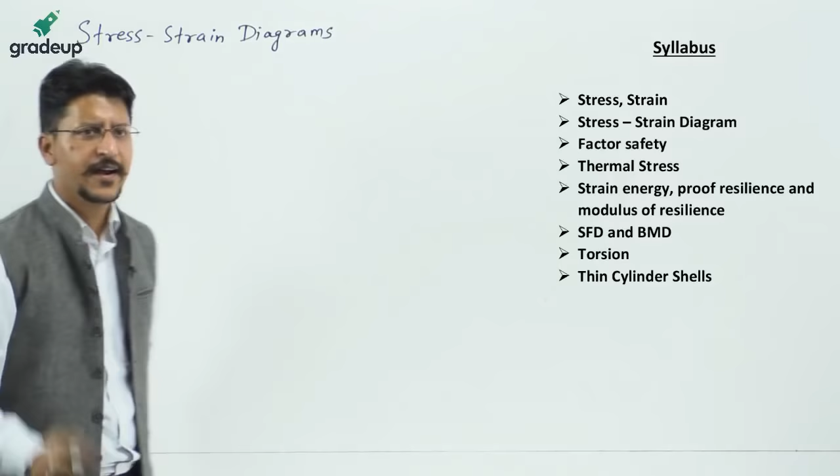Now the stress strain diagram, we will see the concept of the stress strain diagram. We will analyze each and every point in that stress strain diagram in greater detail, and then there are some related terms, like toughness and resilience, and the moduluses of these, that is modulus of toughness, modulus of resilience. Then there comes the concept of strain energy. All these concepts come from this stress strain diagram, so we will have a greater look into this.

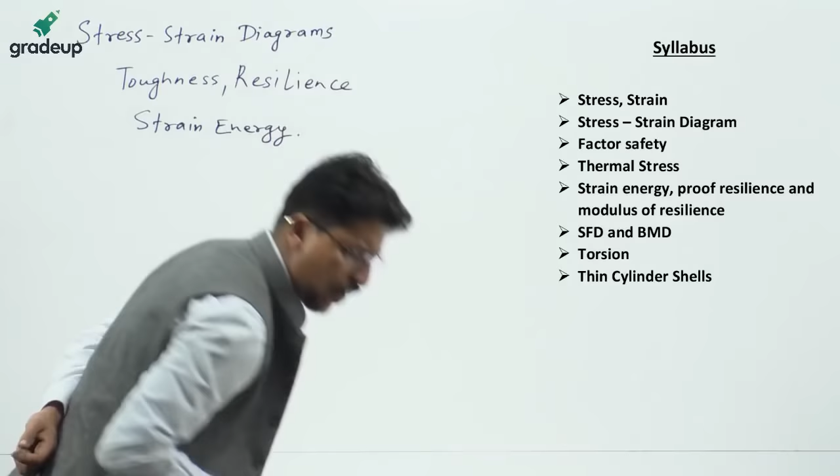Then comes the important topic of factor of safety. It is also one of the important topics when we talk about strength of materials. Then it is written in the syllabus about thermal stress, and in thermal stress there will be all the cases that we will be discussing.

This is not just what we are going to cover, I am telling you the greater details of the syllabus, which if you are preparing on your own, these are the things you want to learn or cover from the exam point of view of SSC and RRB JE, from the subject of strength of materials.

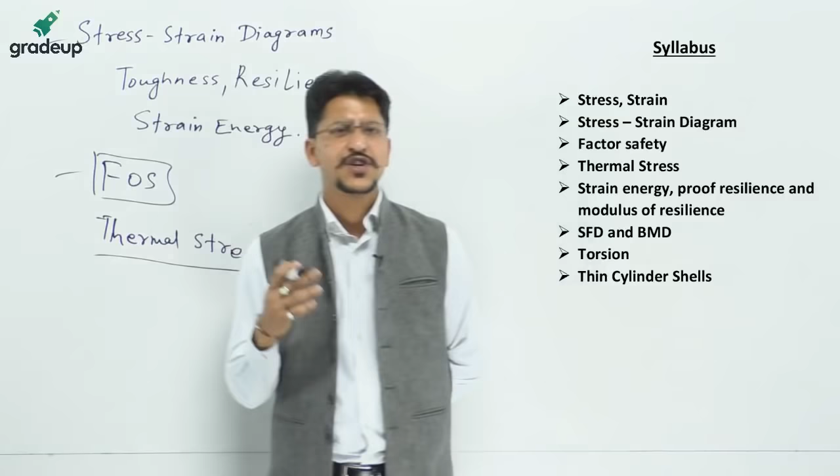So in thermal stress we will be taking the different conditions, like the completely constrained case, partially constrained case, and the free expansion case. Then the strain energy, proof resilience, modulus of resilience, as I have already discussed.

Then about SFD and BMD, there are different important cases. There are different types of beams, the cantilever beams, the simply supported beams. We will see what are the indeterminate and determinate beams, which we will consider in this topic of SFD and BMD.

Then talking about torsion, the twisting, that is also important. The class has just started right now, don't worry, you are not late, we have just gone 5 to 6 minutes into this class.

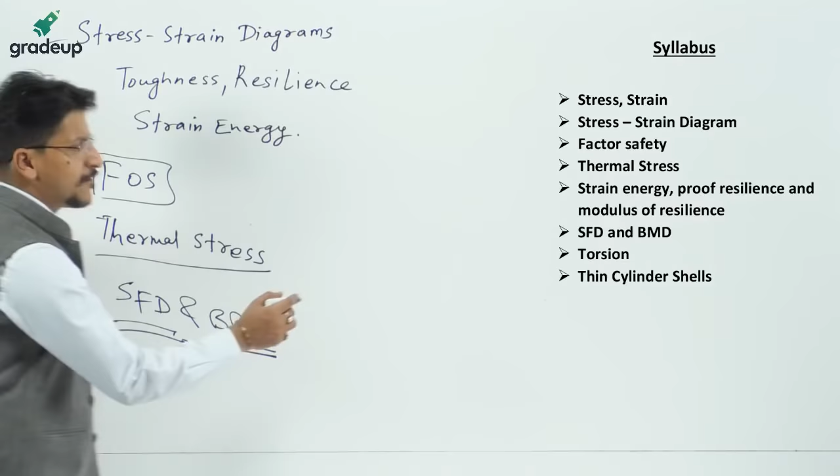In torsion we will be covering, torsion is an important case, we will see shafts that are in series and parallel, that is basically part of the syllabus. Then it is mentioned in the syllabus about thin cylinder shells, which you might have also learned by the name of thin pressure vessels.

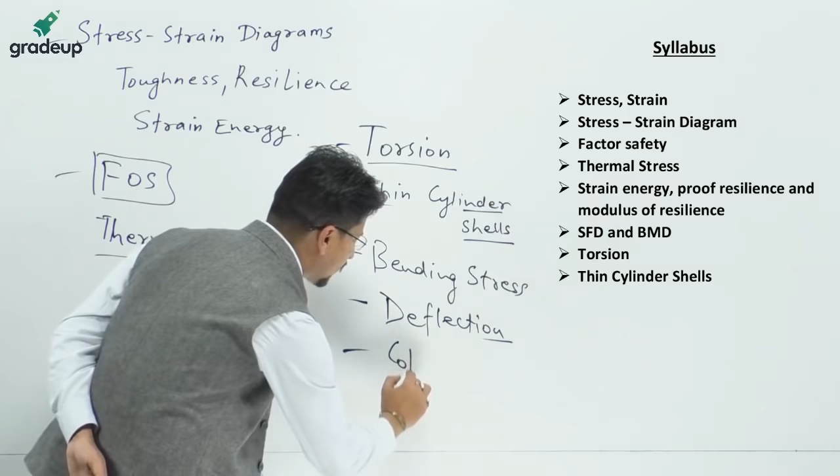These are the important topics mentioned, but other topics which are important but not mentioned in the syllabus are like bending moment or bending stress. Just like torsion, bending stress is also important. Then one topic comes out here, that is deflection. Questions have in the past come from these topics also, bending stress and deflection. And one more topic from which questions have come is column buckling, which you might have also learned by the name of columns and struts.

So these are all the topics which are important or which you really need to cover from the subject of strength of materials, mechanics of solids, mechanics of materials, by whichever name you have read this subject.

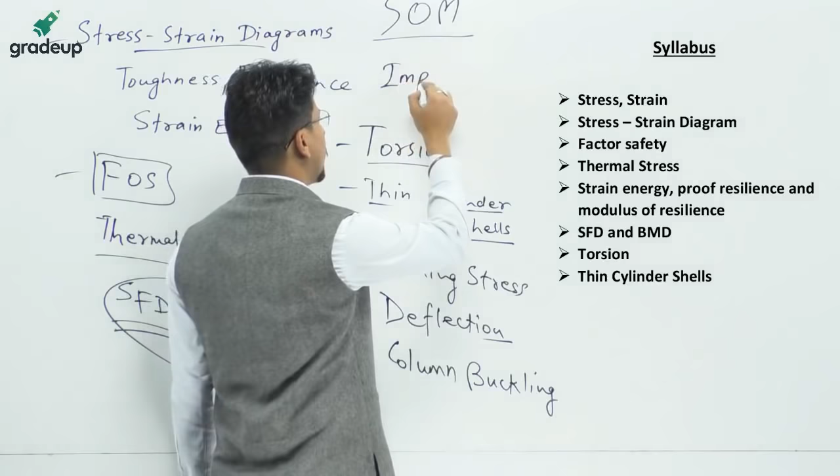The last class is on 27th. In this last class of strength of materials in the Gradeup JE'19 plan, we will be discussing important MCQs regarding the subject of strength of materials, so that we can get some practice. That is the plan for this subject.

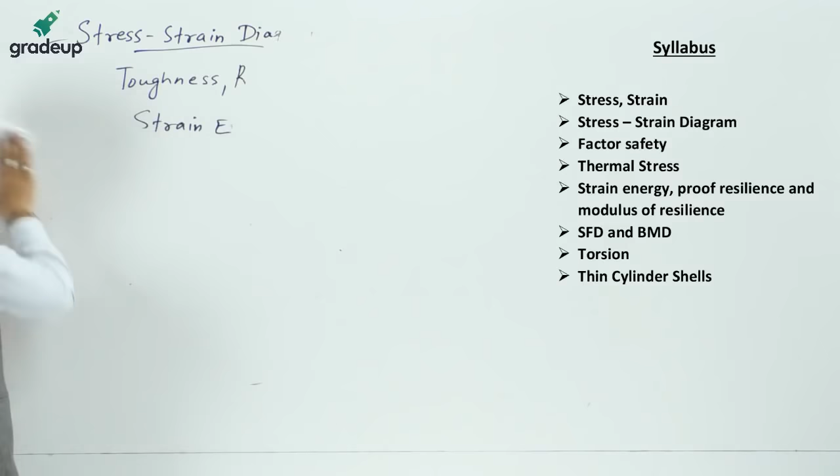So today I have shown you the syllabus. Now I will be showing you around 15 plus questions, the previous year questions which have come in the actual exams of RRB and SSC JE, and you just have to look into those problems, try to identify the topic, give the answer and gauge the level of the examination.

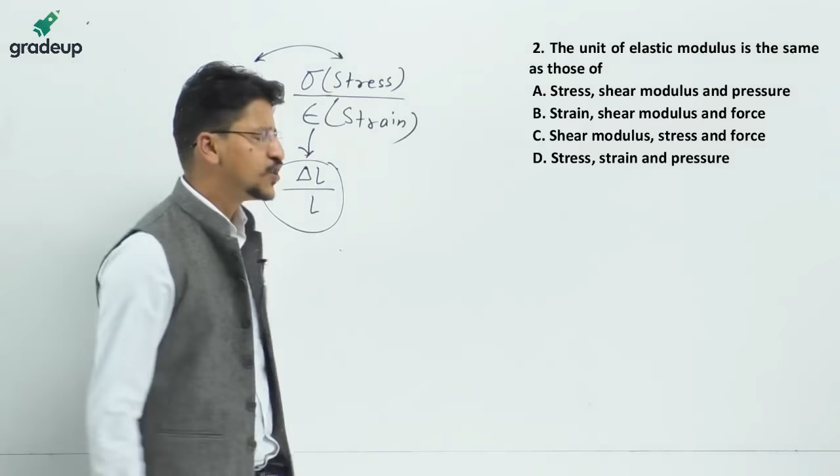G is again tau by gamma, that is the shear stress upon shear strain. This is also shear strain, the angular deformation we measure, so that is unitless, and this has the same unit. So this is stress, G is the shear modulus, same unit, Newton per meter square or Newton per mm square. This is the unit of pressure as well. So all these terms - stress, shear modulus, elastic modulus, pressure - all have the same units. So the correct answer is option A.

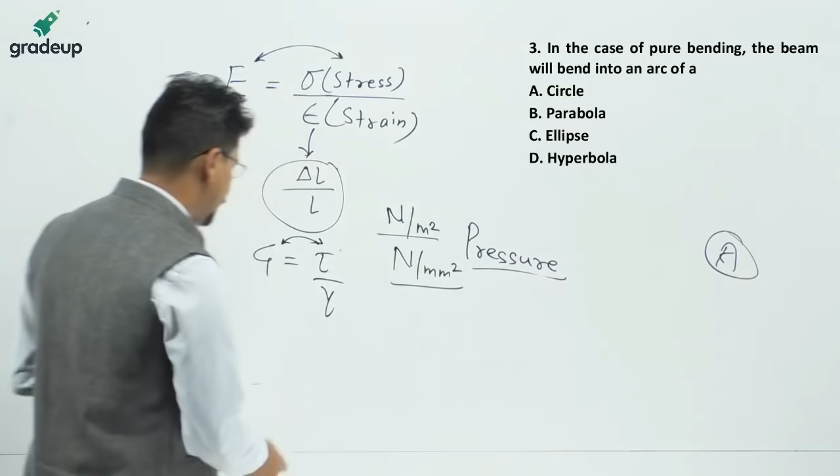Now moving on to the next problem. This says in the case of pure bending, the beam will bend into an arc of. In the case of pure bending, please read the question first and then give me the answer. We are talking about the pure bending case.

Yes, answer 2 is absolutely correct, that is A for 2. Now in the case of pure bending we are talking, the beam will bend into an arc of. Three answers have come in, only one answer I have got. Now I am getting the answer A and B. I have also got the answer as B. Most of you are giving me the answer as A.

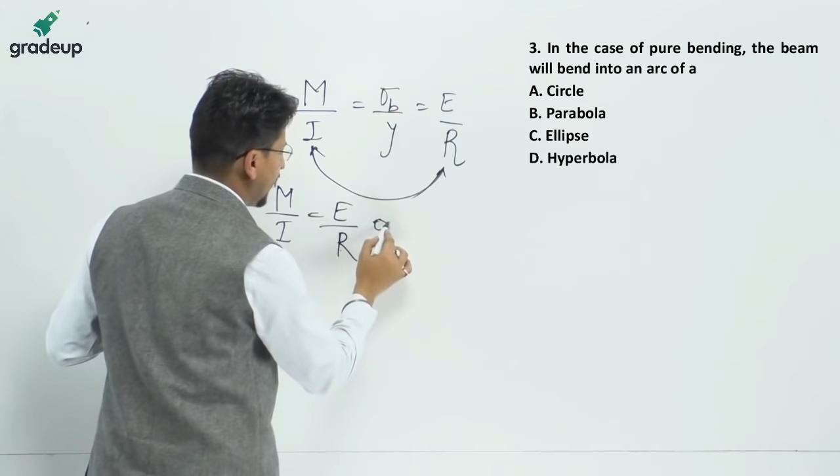From the bending equation, we know that M by I is equal to sigma b by y equal to E by R. This E is the elastic modulus, this R is the radius of curvature of the circular arc. And if we are talking about pure bending, that means this M is constant. So taking these two cases together, what we get - M by I is equal to E by R, or we can also write this as R equal to EI by M. When this is constant, the material E is constant, the I is also constant due to the geometrical property.

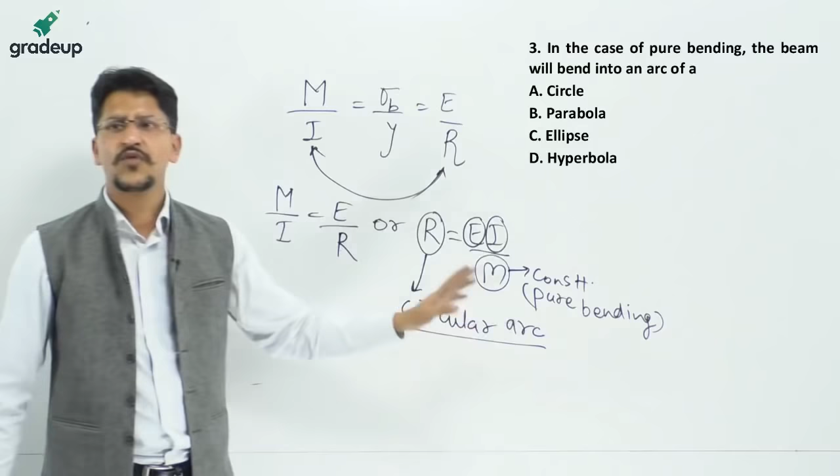And this M is also constant. So this R will be a constant. And when R is a constant, that means it's a circular arc - it will form a circular arc, not a parabolic arc. Parabolic arc is formed when there is the case of only bending, not pure bending. Pure bending means that M is a constant - this is the case of pure bending. Either it is written that it's a case of pure bending or that M is a constant, that means one and the same thing. So the answer for this one is option A. Those who were saying the answer as B, please take a look - B is not the answer, A is the correct answer for this one. Case of pure bending - please note that word pure bending, it is written.

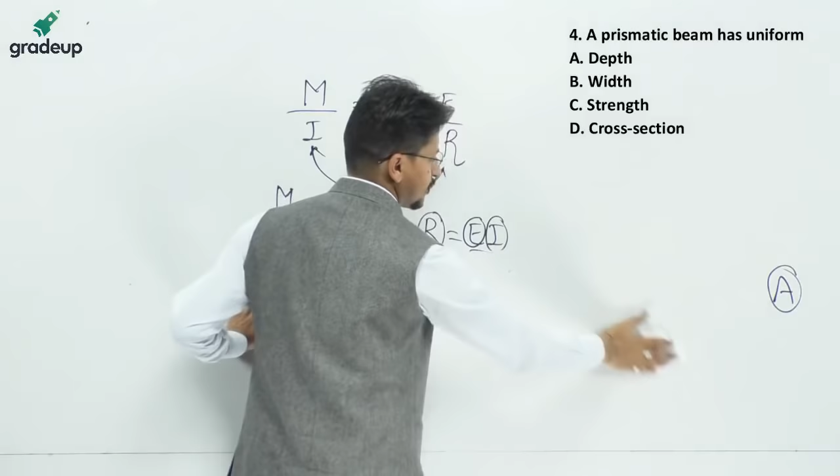Now see the next question. What is a prismatic beam? It is talking about a prismatic beam. What is a prismatic beam? A prismatic beam has uniform - what does a prismatic beam have uniform? Prismatic beam has a uniform...

Option like circular arc. What was written in that? Into an arc of a circle. I don't know what is the problem you are facing. That is the right answer for that one. Yes, Radhe Shyam Prajapat, what didn't you understand? Please tell me.

Just take the bending equation. Take the first and third terms, that is M by I equal to E by R. In the case of pure bending, M will be constant, so R will be constant. And if the radius of curvature of the arc is constant, that means it's a circular arc. Okay, that is what I need to tell you.

Yeah, fourth one. Prismatic beam has a uniform... Some of you are saying D. Most of you are saying D. Some of you are saying B, A, C. I get a mixed set of answers. But what is a prismatic beam? A prismatic beam is a beam which has the same cross section.

Okay, we are not talking about the width here. The width can vary, but the area of cross section must be the same throughout the length of the beam. Okay, so the right answer for this one is absolutely option D. That is, a prismatic beam has uniform cross section or area of cross section.

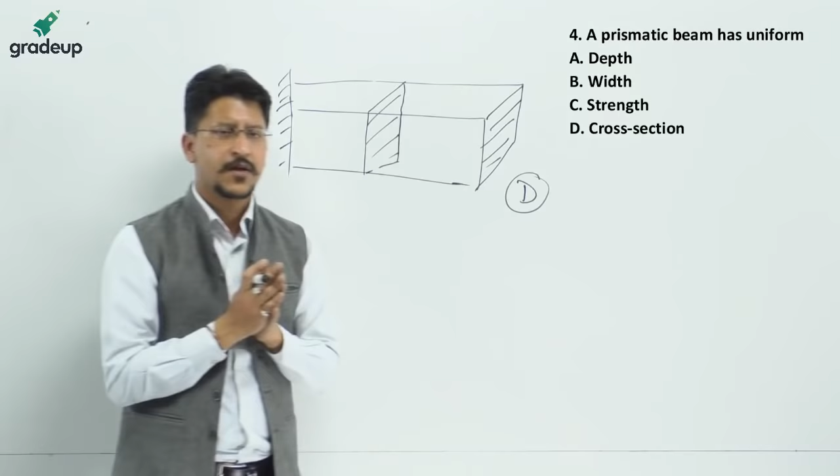I will be constant, because I depends upon the cross section. For a circular cross section, I is constant. If you take a square cross section, I is constant. For a rectangular cross section, I is constant. For the I section, the triangular section, for all those, the value of I is constant. That is the moment of inertia, or the second moment of area.

So that's why I is constant, and E is constant, that is the material property. If it is made of the same homogeneous material, it has the same E. And I depends on the cross section only. And if it is a case of pure bending, then M will also be constant. So that's why R becomes constant and it's a case of a circular arc. The fourth question, I think nobody has any problem in this. Cross section.

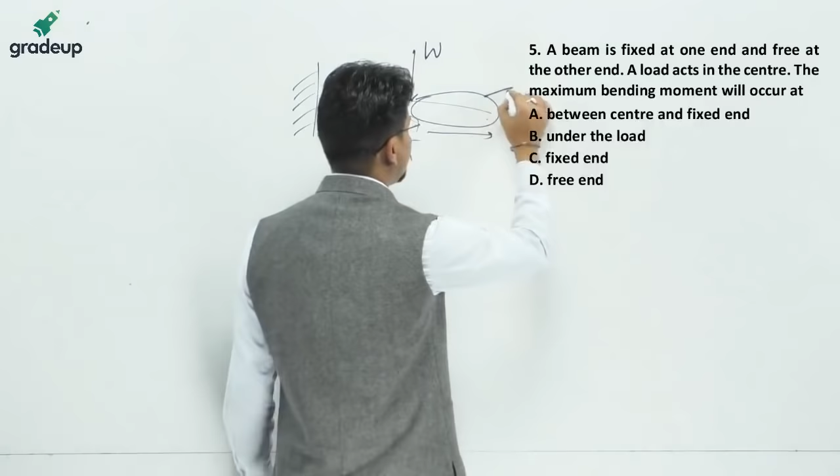Yes. Then if you see this much part of the beam, there is no load acting on this, so there will not be any shear force and no bending moment. So in this case, there will be no shear force and no bending moment in this part. Okay, only the shear force and bending.

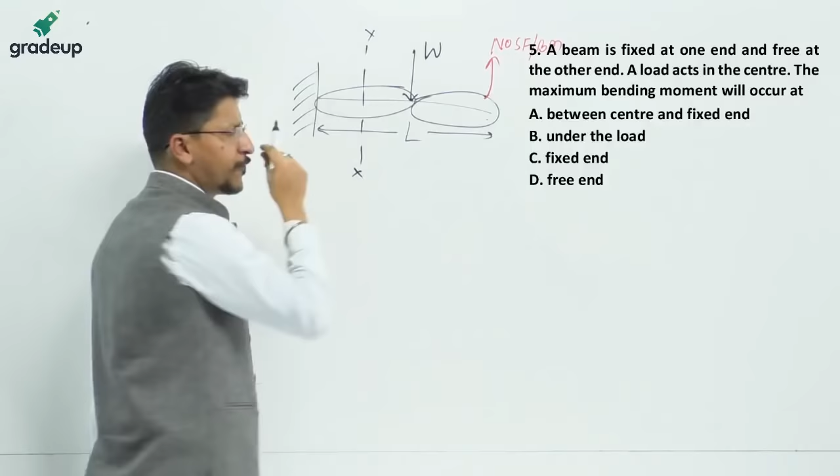In this section, if I talk about, there will not be any shear force and not any bending moment in this much section. Okay, and in this much section, there will be a shear stress and there will be a shear force. Okay, so if you take any section XX from this side, and if you consider it from this length, at a section X, what will be the shear stress? The shear force will be basically W into X. Okay, W into X, that will be the shear force.

And what will be the bending moment? The bending moment will be equal to this force, that is W, into this. Sorry. This will be W. The shear force will be W at each and every cross section from the point of loading till the end point. And the bending moment will be equal to W into X. Okay. So X is starting from this point and going up to here.

So if you write this end point as A, and the point of application of load as B, the bending moment at B will be equal to 0. Why? Because we are considering the X from this point and X at B is equal to 0. So the bending moment will be equal to 0. And the bending moment at A will be equal to W into L by 2. That is maximum, because the X will be maximum at the fixed end. Okay, so the answer is absolutely correct, all of you who have given me the answer as option C.

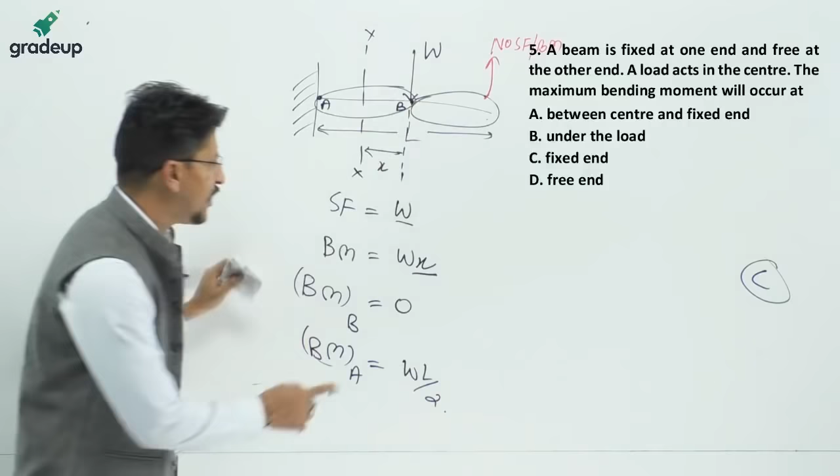So till now you can see that this is the case of a point load, and from the point load, the shear force is a constant and the bending moment is of one order, that is, linearly dependent on X. This we will discuss in greater detail when we come to the class of SFD and BMD. Okay, so till then note this answer, option C is correct. And now moving on to the next problem.

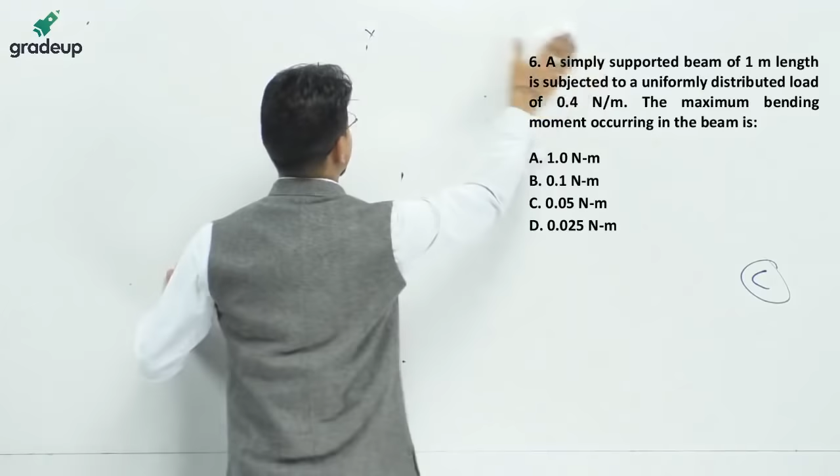Now Rahul, the question which you are talking about, the simply supported beam, has come. Now you can see this. See this question. Maximum deflection is at free end and maximum shear stress is at the fixed end. Yes, absolutely correct. Pankaj Yadav, Ramesh Kumar Singh, you both are absolutely correct. Okay, now read this question.

A simply supported beam of 1 meter length is subjected to a uniformly distributed load of 0.4 Newton per meter. The maximum bending moment occurring in the beam is? Okay, so this is a case of a simply supported beam. Let me draw a simply supported beam having a UDL. Let me draw a UDL out here, having the intensity as 0.4 Newton per meter, and this total length, the span, is 1 meter.

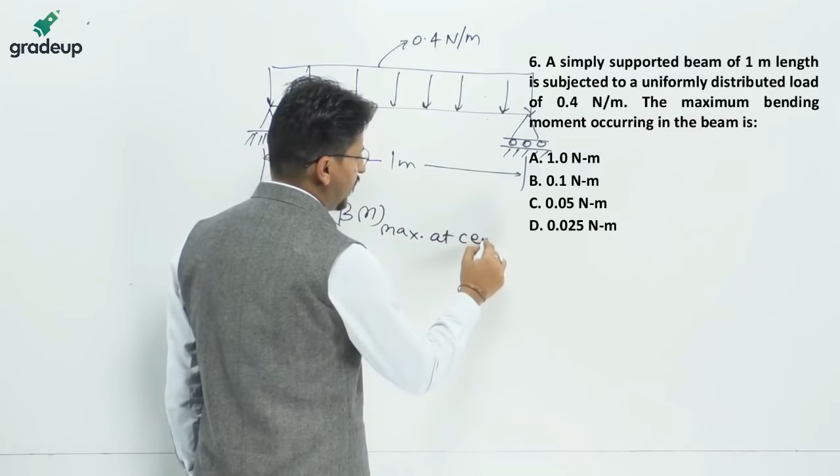So for this case, the bending moment is maximum at the center. That is given by WL square by 8, where this W is the load intensity, that is the UDL. So just put the values, W as 0.4, the span as 1. So 1 square divided by 8. So this is 0.4 divided by 8, which you will get as 0.05. So the answer for this one is 0.05.

That is the answer as C. C is the right answer for this one. About each and every case of cantilever beam, that is the point load, the UDL, the UVL, uniformly distributed load, uniformly varying load, the cases of distributed and varying moments for the simply supported beam, cantilever beam, all that we will discuss in very great detail when we meet on 25th, in the class of SFD and BMD.

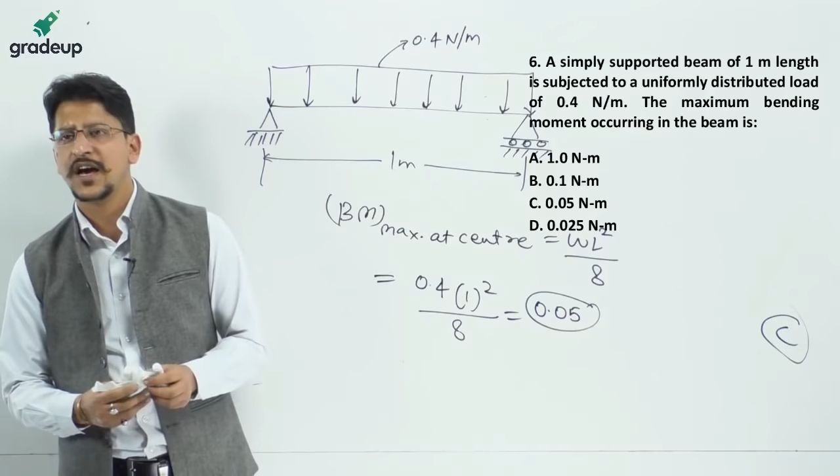Okay, move on. Now the question is from cylindrical shells, that is thin cylindrical shells or thin pressure vessels. Give me the answer for this one. Circumferential stress in a thin cylindrical shell due to internal fluid pressure is given by. We are talking about the circumferential stress. Please note down that, circumferential stress. First of all, you give me the answers.

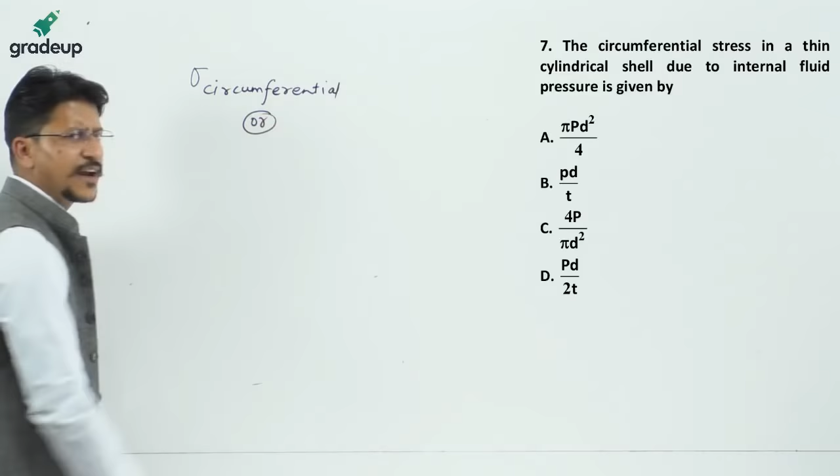So give me the answer for this one. Circumferential stress in a thin cylindrical shell due to internal fluid pressure is given by stress, that is sigma circumferential, also known by another name, sigma hoop, that is the hoop stress. This is given by P di upon 2t. If di is not mentioned, it is obvious that it is the internal diameter. t is the thickness, and P is the pressure. So you get the answer clearly written as PD by 2t.

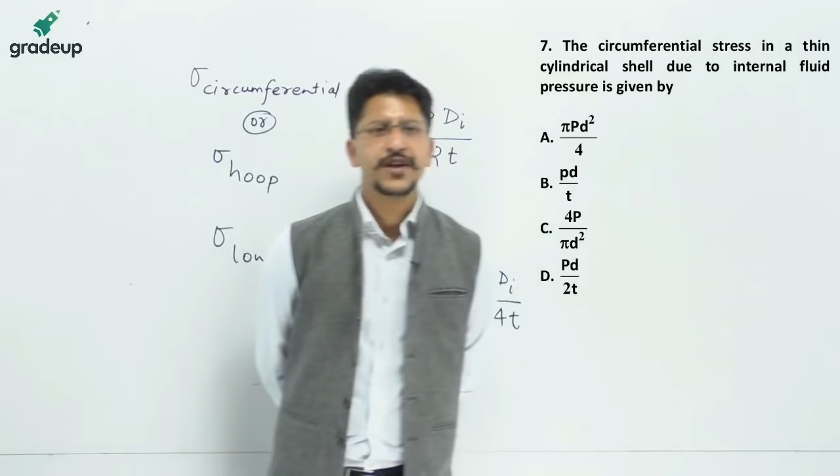And there is one more stress that is not asked in this question, but you must all know. That is the longitudinal stress, which is just hoop by 2, half of hoop, that is PDi by 4t. These are the two kinds of stresses present in the case of thin cylindrical pressure vessels. Now I ask you one condition from this same topic of pressure vessels. This is not part of the questions given here. I just want to have a look at your concepts.

Pressure vessels are of two types, thin and thick. So I want to know what is the value of d by t, that is the internal diameter upon thickness. Can any one of you give me the approximate value of d by t which differentiates or classifies the pressure vessels as either thin or thick? Hurry up. This is just a part of concept, just the starting of the topic of pressure vessels. As the question has come from pressure vessels, you must know this too.

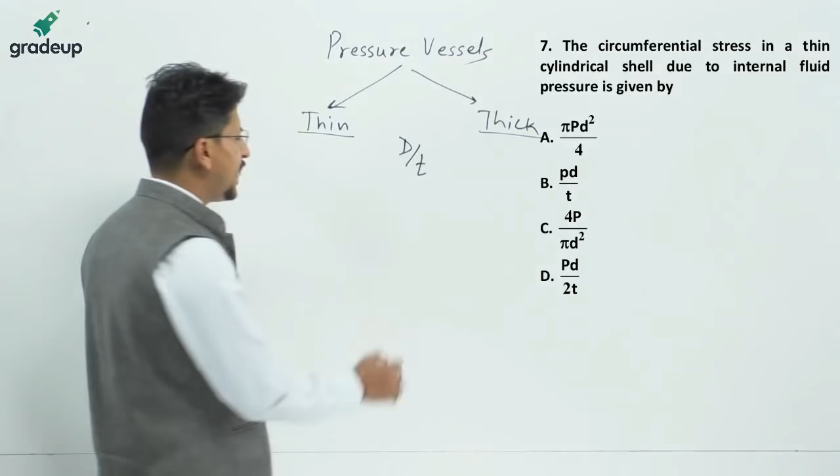That is the d by t ratio, not the slenderness ratio. The slenderness ratio comes in the case of buckling of columns. Yes, d by t. Yes, 20 or 15. Sometimes in some books it is written as 15 as well. Not 10, it's 20. It's either 15 or 20, not 10. If it's less than 20, it means it's thick, and if it's greater than 20, it means it's thin.

Yes, less than 20 means it's thick. Greater than 20 means it's thin. And it's a d by t ratio. As the d by t ratio increases, that means the thickness is decreasing. So thickness is decreasing, that means it's becoming a thin shell.

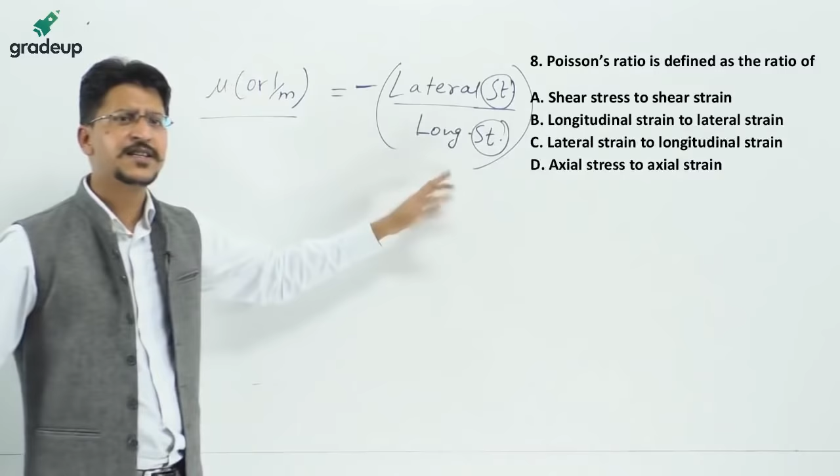If sometimes a question is asked, what is the unit of Poisson ratio? You can see that it is strain by strain. Strain in itself is a dimensionless quantity, and moreover this mu is strain by strain. Okay, so it is the ratio of two strains, so that's why it is unitless, or basically you can say dimensionless. This is a unitless or a dimensionless constant.

Why the negative of lateral strain? That is, why have we introduced a sign here? Okay, because if this is positive, this will be negative. If this is negative, this will be positive. So this ratio will become negative altogether. Okay, if this ratio becomes negative altogether, so to make this value mu positive, it is minus of lateral strain by longitudinal strain.

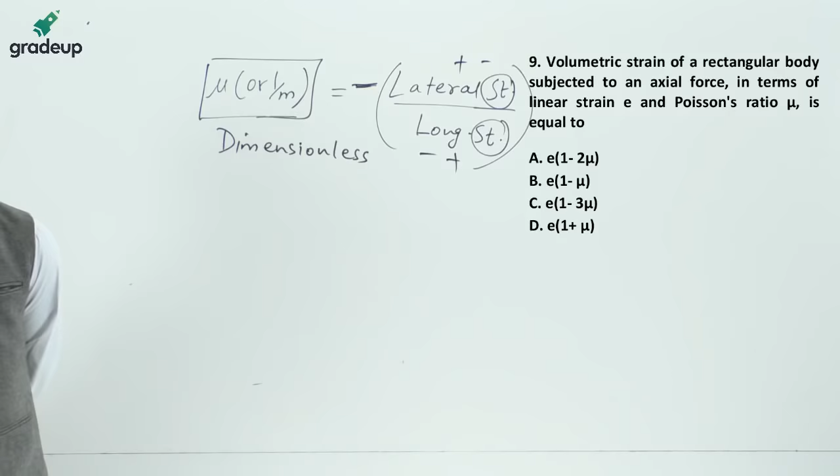Okay, now see the next problem. It says the volumetric strain of a rectangular body subjected to an axial force, in terms of the linear strain e and the Poisson ratio mu, is equal to. See, for this question I will be drawing a diagram to explain in greater detail, and if you follow this kind of strategy, questions like this are not a problem. The concept of stress, strain, the Poisson ratio and everything will be clear through this question.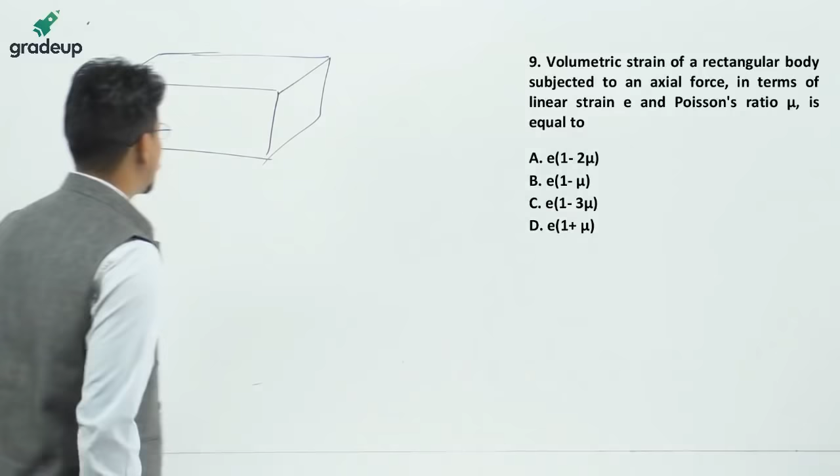What I am going to do here is, see, this is the x direction, the y direction and the z direction. Okay, x, y and z. No, we should not use the value of, that is what the definition only says, minus of lateral upon longitudinal. Okay, so these are x, y and z. This is x, that is px. Suppose the load acting in the x direction is px, this is py and this is pz.

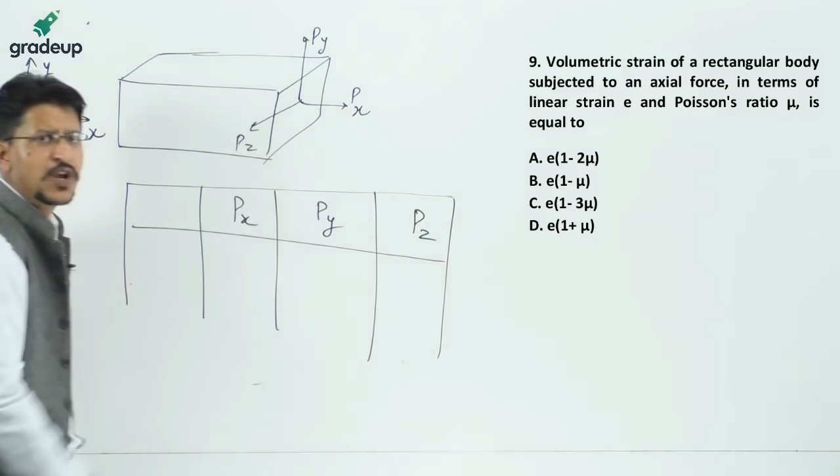These are the three loads acting in the three mutually perpendicular directions. And here I write the directions: the x direction, the y direction, and the z direction. So if you see this, the px load in the x direction will cause a longitudinal stress or longitudinal strain. These are the strains I am talking about, the strains in the x, y, and z directions.

So this can be written as px upon e. For this one it is longitudinal. For the others, this px in the y and z directions will give a lateral strain, so that is minus mu into px by e and minus mu into px by e. Similarly, py will be longitudinal for y, so this will be simply py by e, and this is minus mu into py by e, and minus mu into py by e.

And for the z direction, this will be a longitudinal strain, pz by e, and for these two it will be lateral, so minus mu into pz by e and minus mu into pz by e. Now we see for each direction what strains are produced. For the x direction, we get px by e minus mu times py by e minus mu times pz by e.

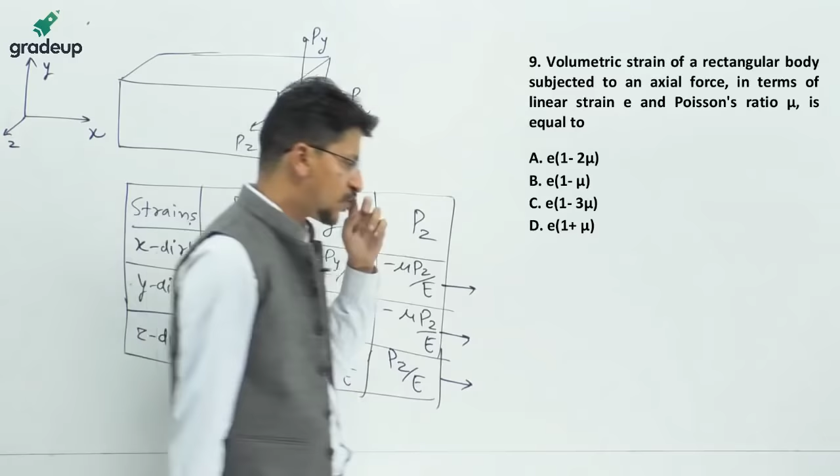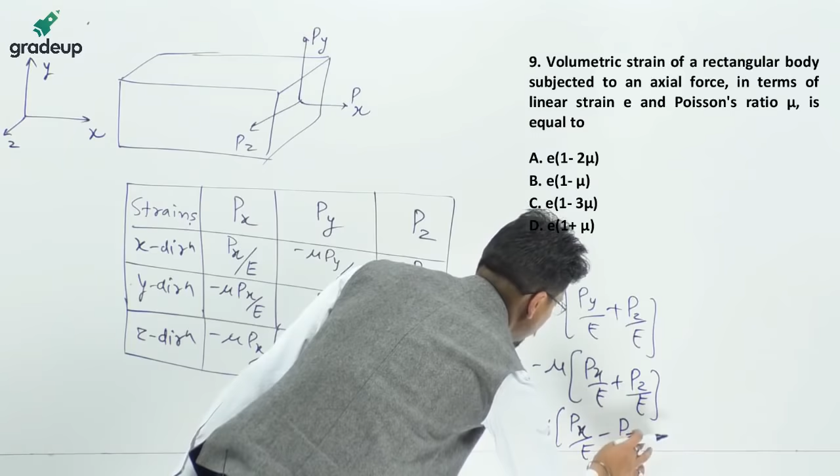So if we talk about this, this will become px by e minus mu times of py by e plus pz by e, for x. For y and z it will be similar: py by e minus mu times of px by e plus pz by e. And for the z direction, this will become pz by e minus mu times of px by e plus py by e.

Okay, so this is basically the value of strain in x direction, strain in y direction, and strain in z direction. And you know the volumetric strain. What is the volumetric strain given by? The volumetric strain is given by epsilon x plus epsilon y plus epsilon z.

Just adding these three terms, we get the value of volumetric strain as px plus py plus pz by E into 1 minus 2 mu. We get this term. So let me rub this one and write it here. Volumetric strain is equal to px plus py plus pz divided by E into 1 minus 2 mu.

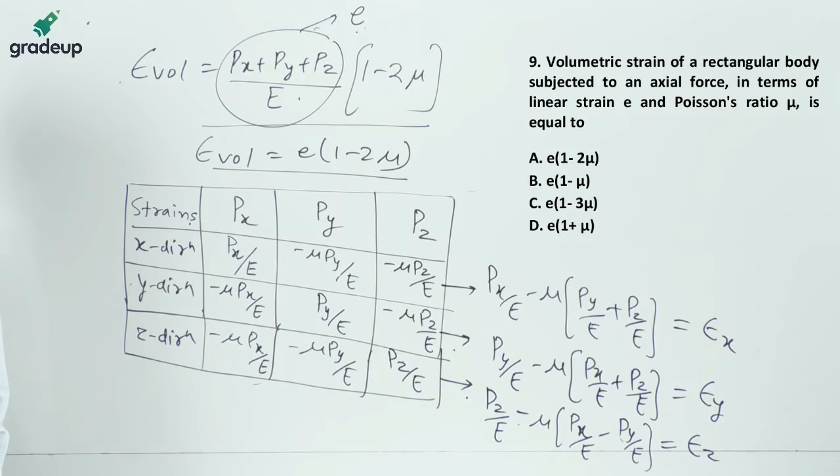This is what we are talking about in this question as E, that is the linear strain, in terms of the linear strain. So the answer for this one is E into 1 minus 2 mu. So this is the answer for this question, that is option number A. But what I have shown you so far is how to understand the concept.

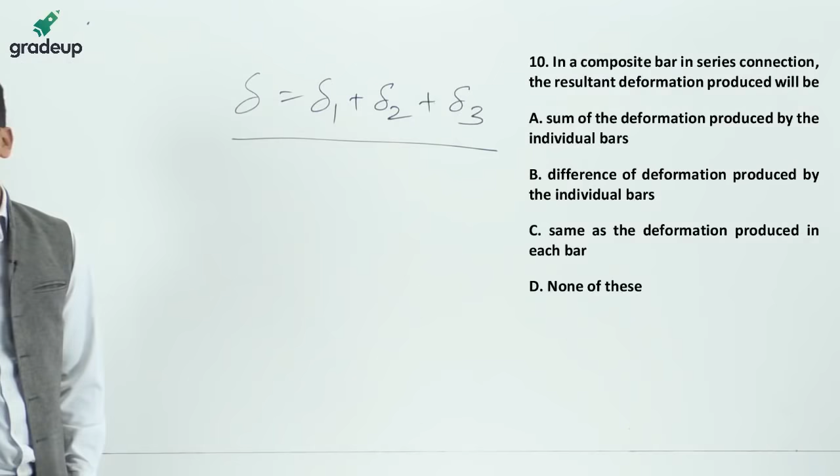Now give me the answer for this one. In a composite bar in series connection, the resultant deformation produced will be. What is the resultant deformation? The resultant deformation is simply, this is the case of bar in series. The resultant deformation is the sum of individual deformations. There is nothing much to explain in this one.

Deformation will be the sum, and this is the case of a series connection. If I move forward and talk about the parallel connection, for the parallel connection the case is that the deformations are equal. In the series case, the deformations are the sum. So the correct answer for this one is option A.

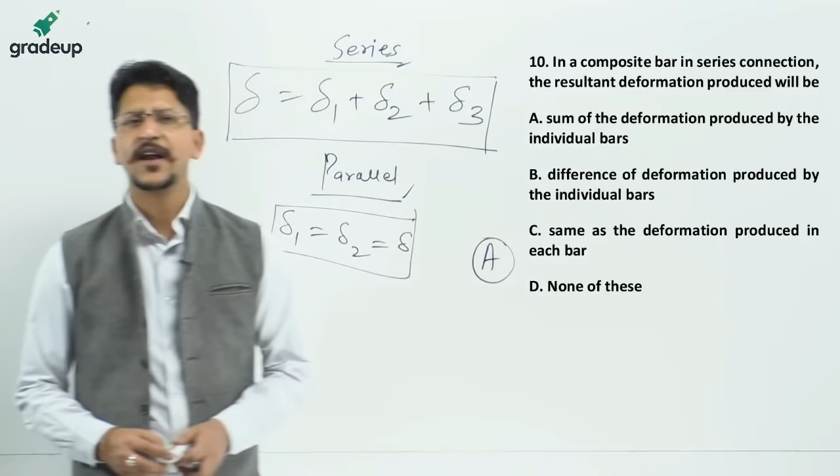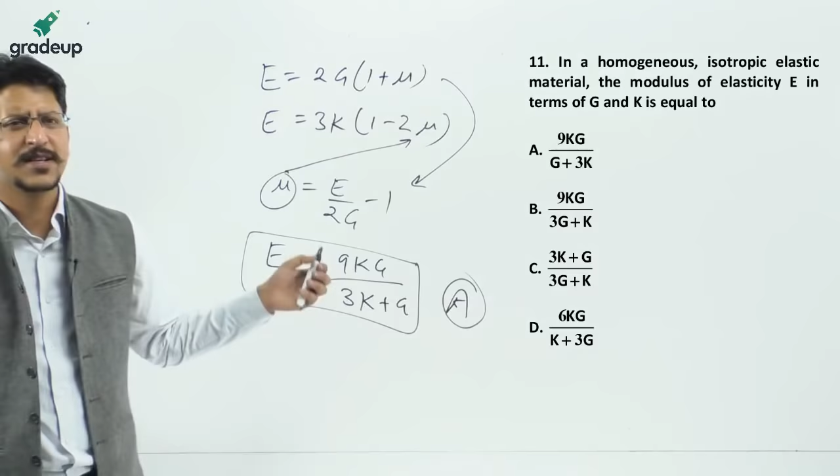That is the option given in A. Yes, all of you are correct. This is a general expression which you should remember by heart, because it will save your time in the examination, since doing these derivations for every problem becomes tough. You already know the other two expressions, so remember this one as well.

Now moving to the next problem. It says a long structural member subjected to an axial compressive force is called. Please read the question carefully: a long structural member subjected to axial compressive force is called.

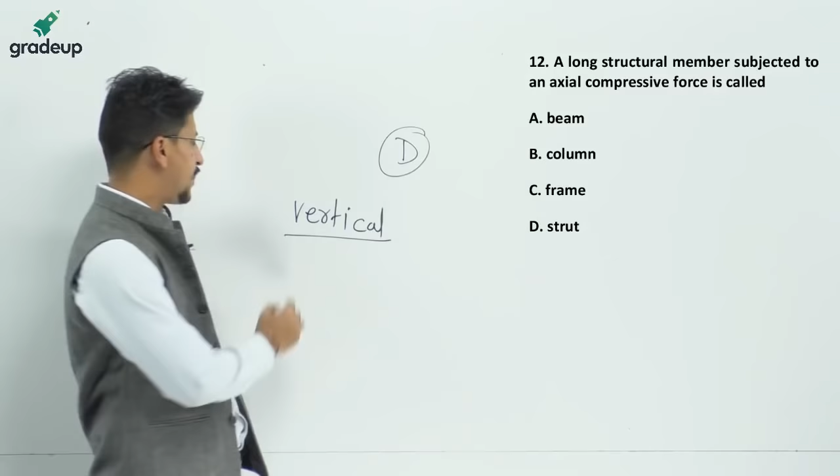If it had been written as a long structural vertical member, then it would be a column. For a strut to be a column, this vertical condition must be there. If it simply says a long structural member subjected to axial compressive force, that is a strut. A strut can be short or long, both. But the word vertical must be there for the strut to be a column. That's why every column is a strut.

Every column is a strut, but every strut is not a column. A vertical member is a column, that is what I am saying.

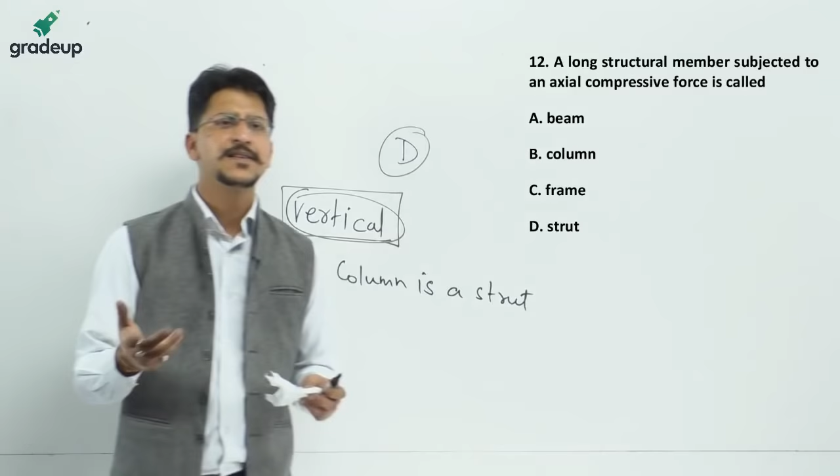Beam and frame: a beam is what we see subjected to transverse loading. This is basically the definition of a beam, a structural member subjected to transverse loading. It can be subjected to longitudinal loading as well, but the definition of a beam says it is subjected to transverse loading.

Now moving on to the next question. The materials which exhibit the same elastic properties in all directions are called what? What are those materials called which exhibit the same properties in each and every direction, independent of the direction? If this is a point, and in all directions the elastic properties are same, what is that kind of material called?

In all the directions, please note that. I am getting mixed answers again, A and C. There is a confusion between homogeneous and isotropic. The correct answer for this one is option C, that it is isotropic material.

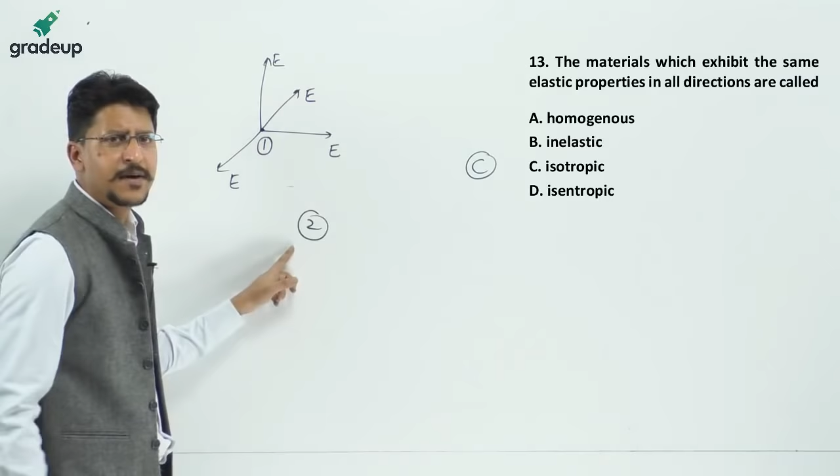See, if this is point 1, and this is another point in the same material, point 2, at this point suppose this is any arbitrary shape of a material. There are 2 points in it, one here and one here, and in these there are elastic constants like in this direction it is E1 at both these points, in this direction it is E2, in the vertical direction it is E3, and in this direction it is E4. So in this kind of material, if you see at every point in all the directions, the elastic constants or properties are different.

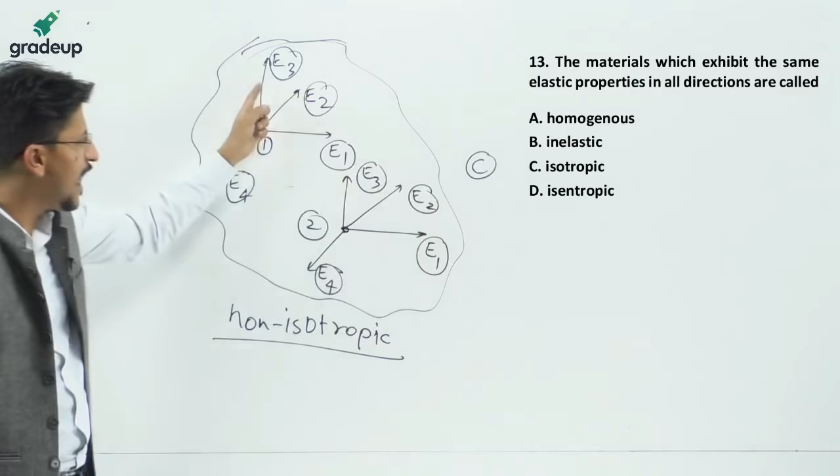So this is a non-isotropic material. Now at each and every point, if you see in the same direction, the elastic constants have the same values at every other point. So this material is a homogeneous material. This becomes a homogeneous material.

Homogeneous means values same at every point in a given direction, and isotropic means values same in all directions at a given point. That is the difference between homogeneous and isotropic. I hope you get this concept clear. Now you won't be doing any mistakes.

Now what's the confusion, Abhishek? Ask, if you have any confusion in this question, what's the problem? Ask fast. What's the doubt you have or anyone of you have in this question?

Please ask. I am saying that if there is a material, if you take any point in a material, and at that point in all the directions, if you see isotropic - no, it's not isentropic, it's isotropic. Isentropic is a process in thermodynamics that we have already understood and read.

Now, anyone of you having confusion or doubt in this, please have a look. I am explaining it once again. Yes, I am doing that. Please look here.

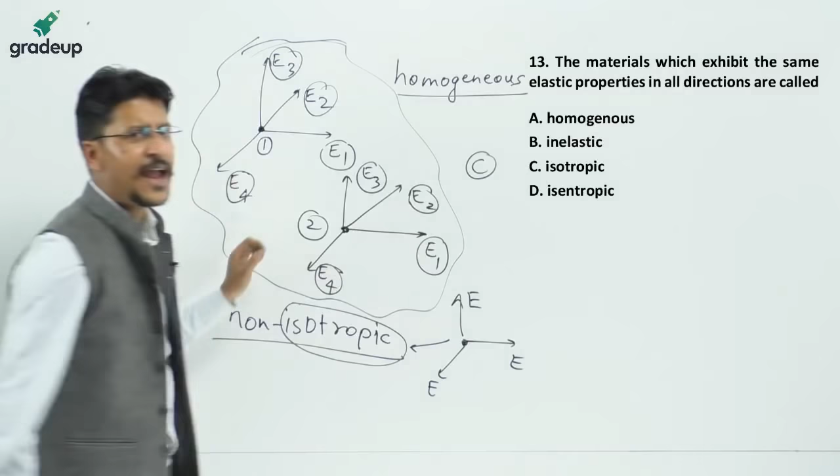Then, for homogeneity, to check the homogeneity, what you have to do is take at least 2 points, and in those 2 points, check the value of elastic constants in a particular direction. Like we have seen, in the horizontal direction it is E1, in the vertical direction it is E3, in this direction it is E4, and in this direction it is E2. That means the values in a particular direction at each and every point within this material is the same. That means it's a homogeneous material.

So I will give you a hint to remember this. Isotropic means the properties are direction independent. Just remember this.

That means if the properties are not depending upon direction, that means the properties are the same in all directions, so it's an isotropic material. And homogeneous means they are not depending upon the points; they are point independent. At each and every point in a particular direction, the values of the elastic properties or elastic constants are the same. Now I hope everyone's doubt is clear on this one.

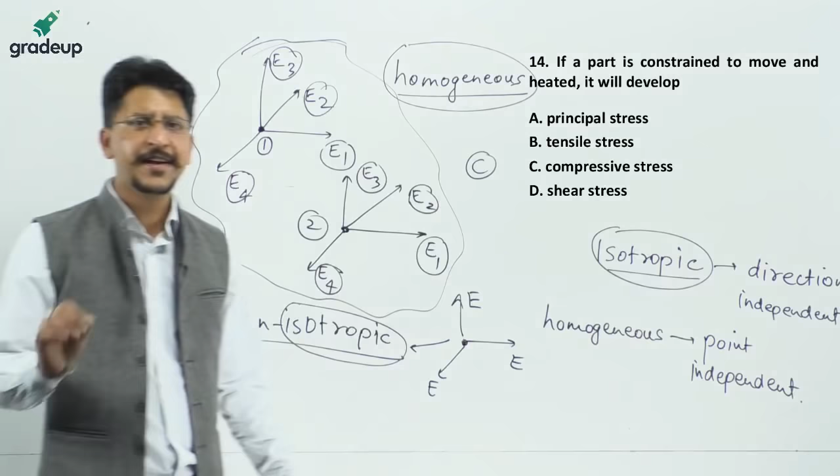Now moving on. Next question. If a part is constrained to move and heated, it will develop which kind of stress? Principal stress, tensile stress, compressive stress, or shear stress? Give me the answer for this one. C. I have got the first answer from Abhishek. It's C. Now give me other answers fast.

We are already 1+ hour into this session. I don't want to extend this session too long. Please hurry up. Not B.

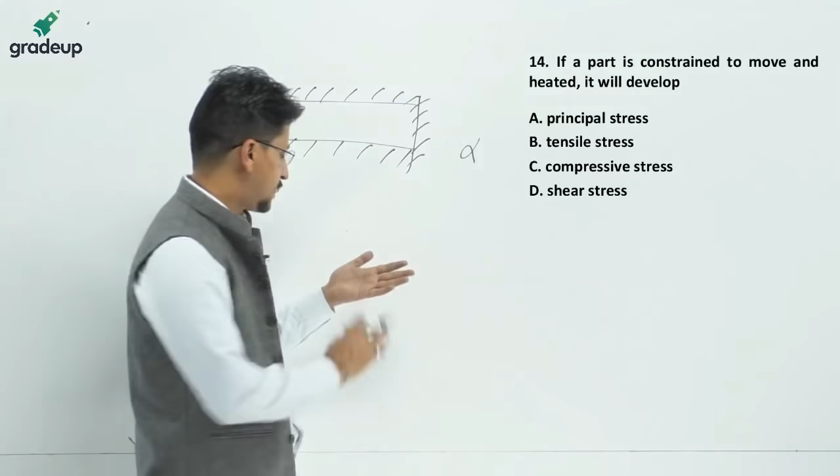It's compressive stress. Why compressive stress? I will explain it to you. Suppose this is a member, constrained from all directions. If it is heated, and it has alpha, the expansion coefficient, and delta T is positive, meaning it's heated, and alpha, the coefficient of linear thermal expansion, is also positive, what will happen when you heat this material? It will try to expand in all directions.

And when it tries to expand, because these supports or reactions are rigid, they won't allow this body to expand. So if the body is not able to expand, from all directions there will be reactions acting towards the inner side of this body. And due to these reactions, compressive stress will be developed in this body.

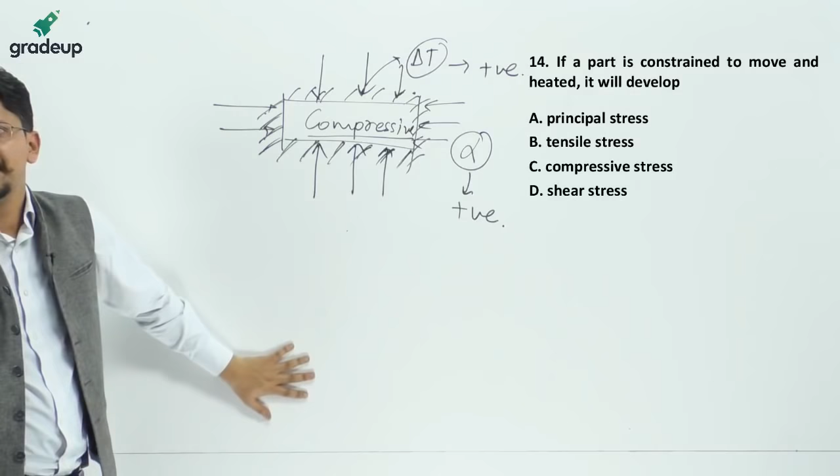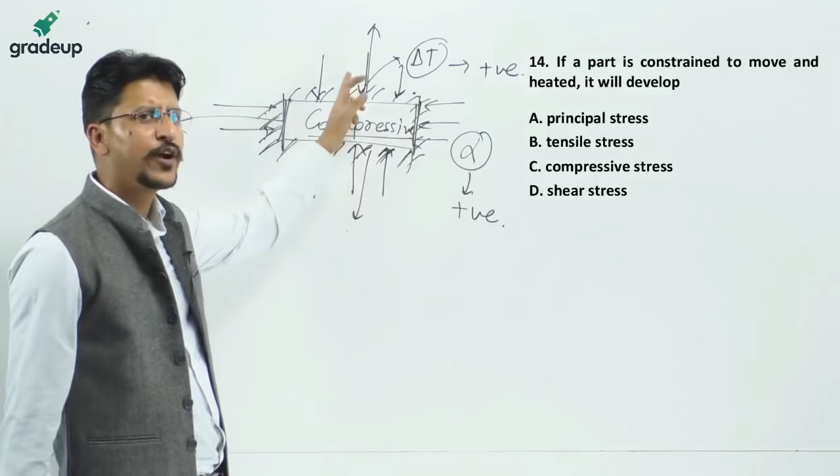If the bar is cooled, and it has a positive coefficient of thermal expansion, meaning when heated it expands, then when cooled it contracts. When it contracts, the support reactions will try to expand it from all sides, because they are rigid and are not going to leave the component. They try to stretch it in all directions, and then surely it will be tensile stress.

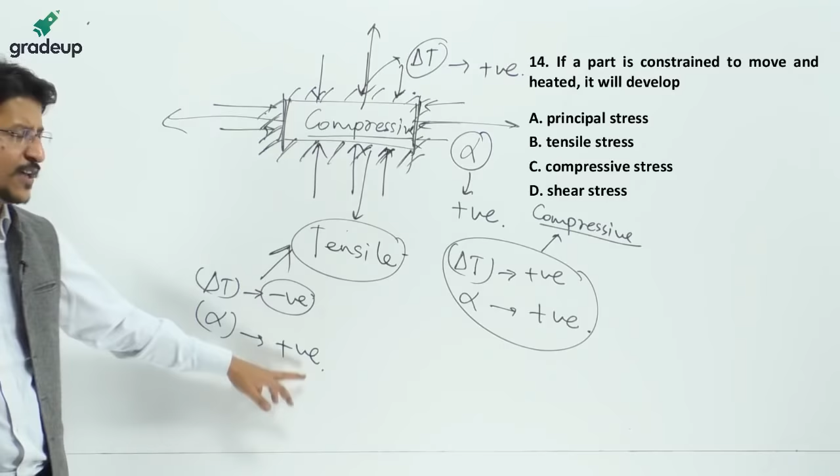So please note, whenever delta T is positive and alpha is also positive, meaning the material expands on increasing temperature, compressive stress will develop in the material. And when delta T is negative but alpha is still positive, meaning the body contracts when the temperature decreases, tensile stress will develop in the body.

Now moving on to the next problem, the 15th one. It says, for steel, the ultimate strength in shear as compared to in tension is nearly what? What is the ratio of these two? That is SUT, ultimate strength in tension, and SYS, the shear stress. Basically it is asking you the ratio SYS by SUT. This is nearly what?

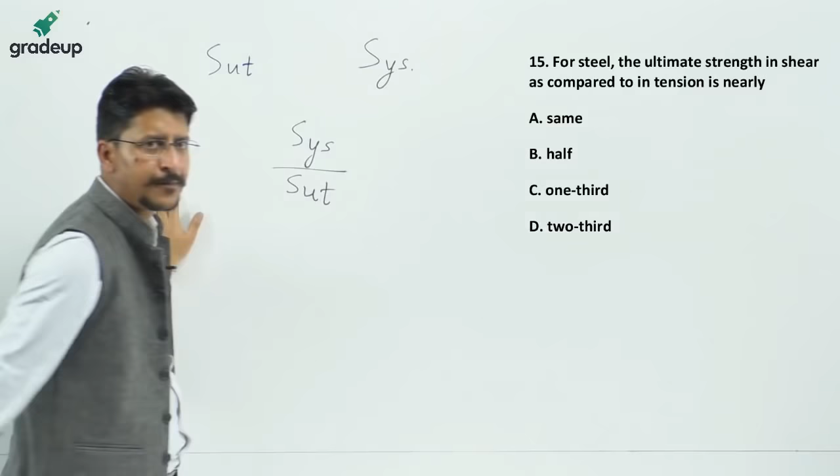Same, half, 1/3, 2/3. You don't have to take that much time; this is a simple one. The answer is half, that is 1/2. SYS by SUT, or sometimes SYT is written, the yield stress in tension. The ratio for both is half, or 0.5. A is not the answer. B is the correct answer.

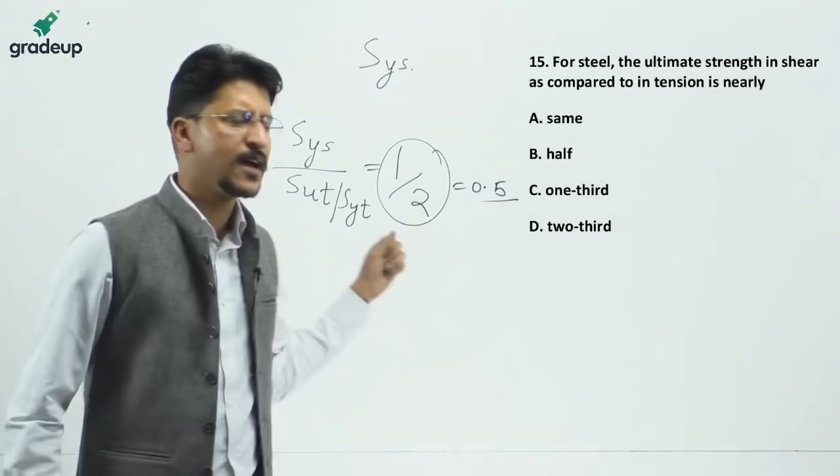Now, moving on to the 16th problem: the deformation per unit length in the direction of force is known as what? Deformation per unit length in the direction of loading. If this is the body, this is the direction of force, and this is L. Due to this force, if the body expands by delta L, then delta L by L is known as what? This is the question.

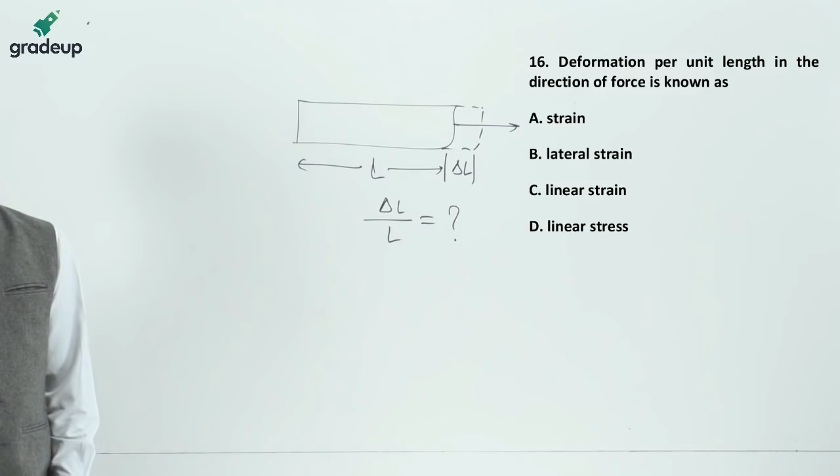Delta L by L is known as what? This is known as linear strain, absolutely correct. This is again a very simple problem.

I won't be taking too much of your time into this session. Okay, we are already around 75 minutes into this session. I won't be taking a lot of time.

The answer for this one is linear strain. Okay, if it would have been asked in the direction that is transverse to the loading, that means in this direction, if this is D and when this material increases, this decreases to this much, that this much is basically the delta D. Okay, delta D with the diameter which has decreased. So this delta D by D would have been lateral strain.

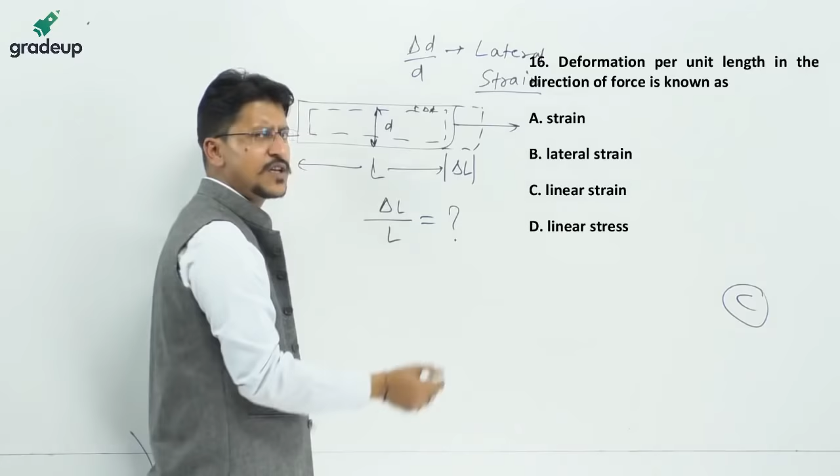This would have been the lateral strain, and the ratio of this lateral strain by this longitudinal strain is nothing but the Poisson ratio that we have already discussed. Okay, yes, linear strain. Now moving on further, it says the validity of Hooke's law. The Hooke's law holds good up to which point? The yield point, the limit of proportionality, the breaking point, or the elastic limit.

17, the answer for this one is, please everyone remember this, that Hooke's law is valid up to the limit of proportionality. That is, B is the right answer for this one. Okay, in a stress strain curve, if you see something like this is the elastic point or the elastic limit, then this is the proportionality limit after which the yielding starts. Okay, this is suppose the proportionality and this is the elastic. Okay.

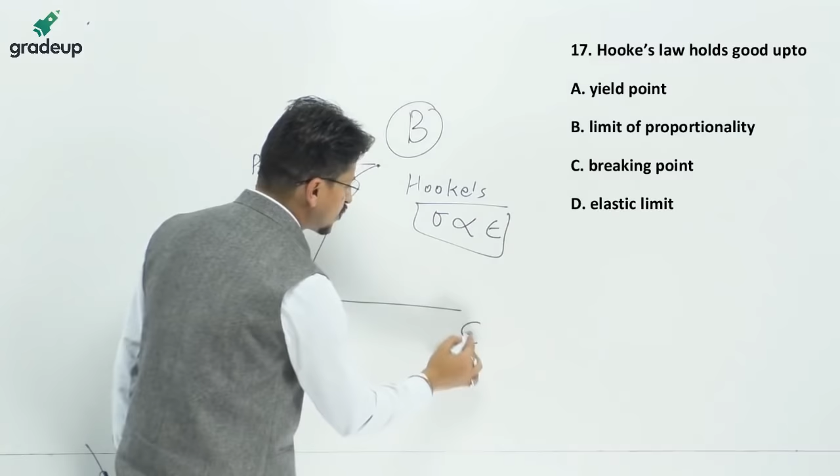So the Hooke's law is valid. Hooke's law basically defines that stress is directly proportional to the strain. This is stress, this is strain. This is stress strain curve. If you see into this stress strain curve, this Hooke's law says that stress is directly proportional to strain. Okay, and this is valid up to the elastic limit. Sorry, this is valid up to the proportionality limit, not up to the elastic limit. Okay, B is the right answer.

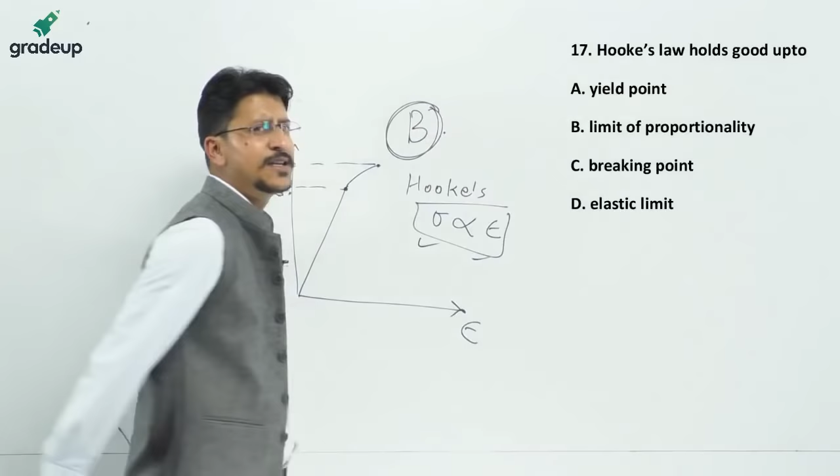I absolutely agree with you, Surya Bharat. You say that Hooke's law states that within elastic limit, stress is directly proportional to strain. That's absolutely correct. But please mind my words as well. I am saying something to you, that the limit of proportionality is that point up to which the Hooke's law is valid. Okay. Stress is directly proportional to strain.

Okay. Now, we are into the second last problem. Please give me the answer for this one. Resilience of a material is important when it is subjected to. Resilience. Resilience. Yes, elastic point is above the proportionality limit.

Oh, yes, yes, absolutely, you are right. Elastic limit, yes. Sorry, I made that wrong. Okay, wait. Yes, you are absolutely correct. I am really sorry for that. This is the proportionality limit and this is the elastic limit.

Yes. Above the point above which the yielding starts, that is the elastic limit. And this is the proportionality limit up to which the Hooke's law is followed. That is, stress is directly proportional to strain. Yes. I am making this correction.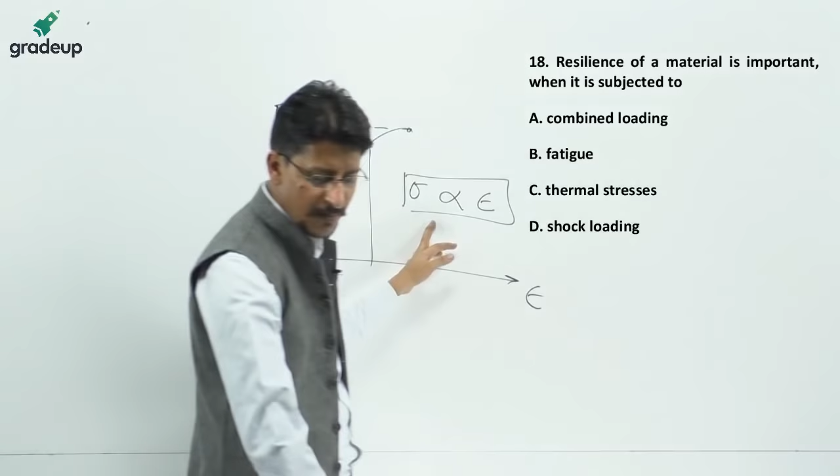Please note into the last problem. It says that Hooke's law holds good up to the proportionality limit. This is the proportionality limit that is below the elastic limit. Yes. Thank you to anyone who has given me this explanation. Yes, absolutely correct.

Now the answer for this one. Resilience of a material is important when it is subjected to combined loading, fatigue, thermal stress or shock loading. Yes. So both the resilience and the concept of toughness are important when the material is subjected to impact loading, or in other words it is also called shock loading. When the material is subjected to impact or shock loading, then these concepts of resilience and toughness are important. Okay.

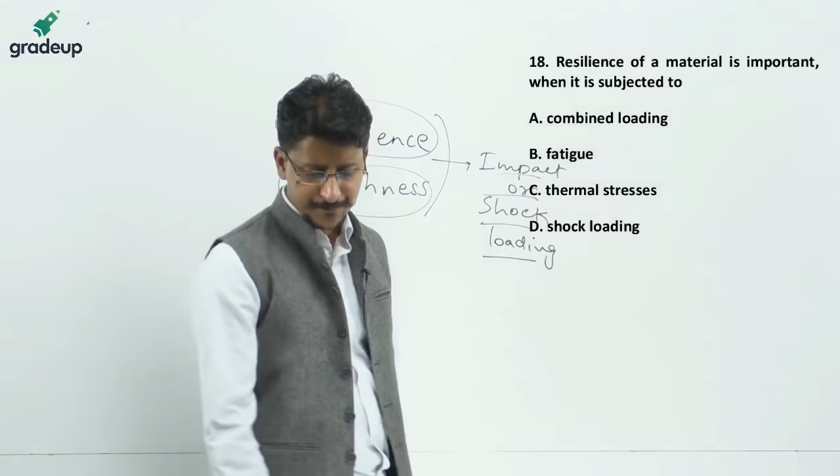Shock loading, yes. Now, the last problem: the property of a material which enables it to resist fracture due to high impact loads is... Shock or impact load, both are same. Okay, impact loading or shock loading, both are same. Okay. Yes, give me the answer for this one.

The property of material which enables it to resist fracture due to high impact loads is known as... We are talking about the fracture. Anyone, the answer for this one? The last problem of the day. The property of a material which enables it to resist the fracture due to high impact loads. That is the fracture we are talking about. Yes, toughness. The correct answer is toughness. Okay.

Okay. So just a little bit of concept. This is a kind of a stress strain curve. So this is the elastic limit. If we talk about the energy, or the strain energy, that is stored within the elastic limit, whatever is stored, that is resilience. What is resilience? The energy that is absorbed in the material within the elastic limit is resilience.

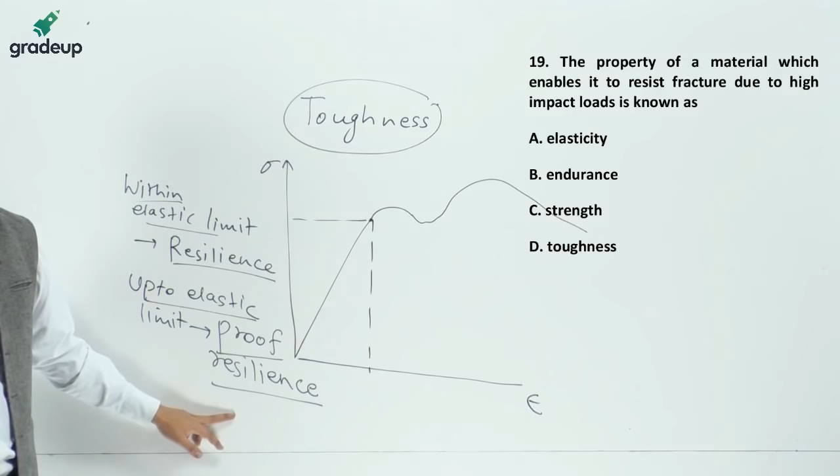Up to elastic limit, if you talk about, that is proof resilience. The maximum value of strain energy that is absorbed by the material up to the elastic limit, or the maximum in the elastic region, that is proof resilience. Any strain energy that is absorbed within the material, within the component, within the elastic region, is known as resilience. The maximum within the elastic region, up to the elastic limit, is known as proof resilience.

And the total, if you talk about up to fracture, that is known as toughness. These are the differences. Strain energy can be anything. Strain energy is an energy that is absorbed by the body. That is half sigma into epsilon. This is the strain energy, any.

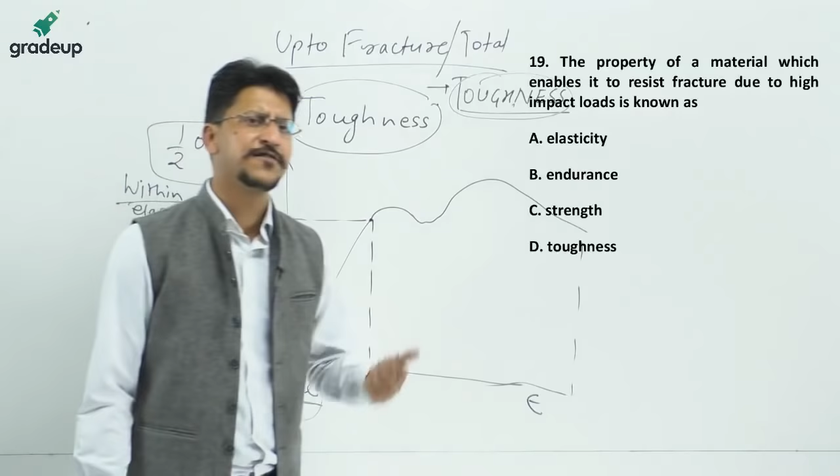But within elastic limit it is known as resilience. Up to elastic limit it is known as proof resilience. And up to total or fracture it is known as toughness. These are the differences. Yes, maximum strain energy that is stored within the elastic limit is the proof resilience. Absolutely correct. Then there are two more terms, the modulus of resilience and modulus of toughness. That is nothing but the proof resilience per unit volume and toughness per unit volume.

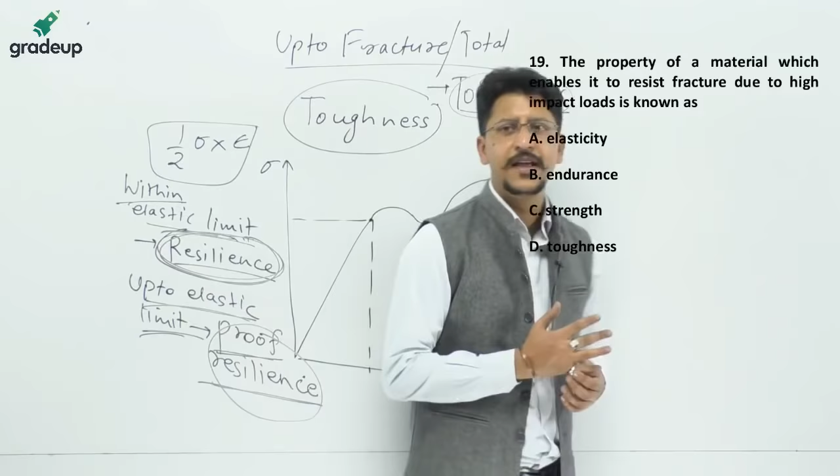Endurance means the maximum value of stress that a material can withstand in the case of cyclic loading. That we will discuss in design against dynamic loads in the subject of machine design. Difference between strain energy and resilience I have already told you.

Strain energy is half into sigma into epsilon, that is half stress into strain. Within elastic limit, that is known as resilience. Up to elastic limit, the maximum value is known as proof resilience, and up to total, that is up to fracture, that is known as toughness.